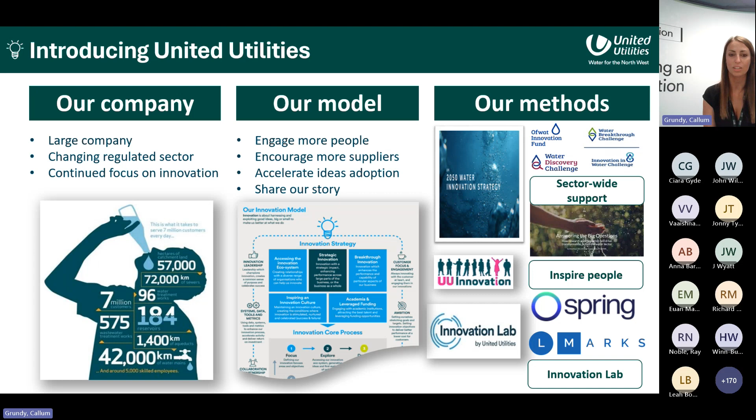Part of that is working on the OFWAT innovation competition and using the sector strategy - the 2050 water sector strategy - to hone in on the types of things we should be looking at, pushing them through different means of funding, with the OFWAT innovation competition being just one of those in terms of leveraging funding through that competition. I think the next slide should talk a little about the OFWAT innovation competition itself.

It's a £200 million innovation fund to help the England and Wales water sector grow its capacity to innovate and meet the evolving needs of our customers, society and the environment. The fund aims to go beyond the sector's business-as-usual innovation practices and create significant value for customers, society and the environment. In AMP7, that fund was £200 million, running to 2025, so we're nearly at the end of our investment period in England and Wales. We run in 5-year cycles, and in AMP8 we're looking at an increased innovation fund and more competition. We're really excited to be stepping into that. There are a couple of links on the screen for places you can go to find out more about the OFWAT innovation competition.

There's actually 3 components to the competition. There's the Water Discovery Challenge, which is led by suppliers, but the two that are led by water companies are the Water Breakthrough Challenge Transform and Catalyst programme. And we sat within the Transform stream for this project.

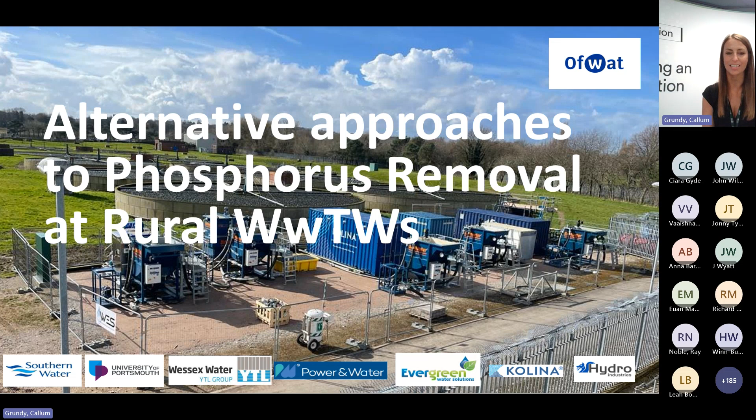Really excitingly, we were able to secure four of the electrocoagulation suppliers as partners on our project. These guys were supportive of putting their technologies side by side on a test against our conventional way of removing phosphorus. They were keen to get involved that they became partners on the bid, and they put up some funding to help us with that 10%. So we really thank everyone that is part of our partnership for making this project the success that it's been so far.

Phosphorus removal at rural wastewater treatment works - why do we need these alternative approaches? Well, our conventional way of removing phosphorus is really reliant on metal-based coagulants.

It is pervasive across the whole of England and Wales, and many other countries across the globe are really focused on removing phosphorus requiring chemicals. For us, as a water company in the Northwest, we've got some really challenging drivers to deliver in very small rural communities. We've had that in our current investment period in AMP7, and we can see lots more of that in AMP8. That was the same across a number of the project partners that were interested in the project, specifically for Southern Water and Wessex Water. This is a real challenge for us, and why we put the project together.

So we needed to look at alternative approaches to improve the quality of water in our rivers. We've got a number of phosphorus removal drivers in AMP7, around 900 of them, and we're seeing a similar magnitude as we head into our next investment period. These will mostly be delivered with chemical coagulants, and this has an impact on our carbon footprint. Chemical coagulation has a significant carbon impact.

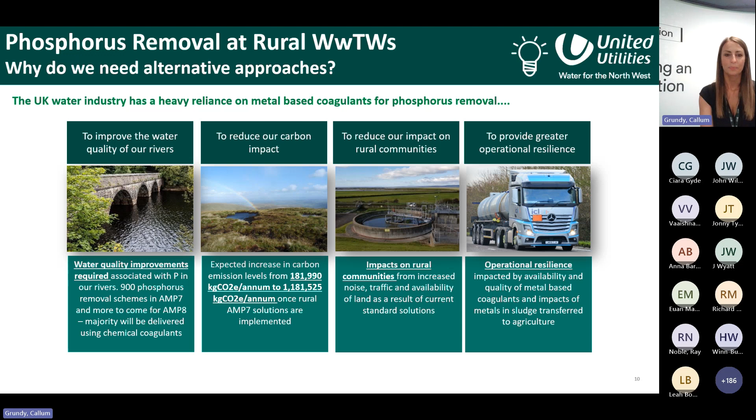Looking into AMP8, we know that phosphorus targets are getting much more pervasive across all of our sites, as well as the level of that phosphorus limit driving down lower and lower as we've moved through the AMPs. We have lots of ways that we've been trying to tackle this in terms of standard chemical dosing approach, both at UU and across the water sector, in things like biological phosphorus removal, but that is much more applicable to large wastewater treatment facilities and less so to small rural sites.

At UU, we had been looking at adsorptive medias or reactive medias, and we've been working with lots of other water companies for a number of years on trying to share that knowledge. So we thought that maybe the place to take that was into the OFWAT competition.

We also looked at electrocoagulation, and we were really excited about this as an alternative method. Callum will talk a little bit more about what this means, but for us, we didn't have certainty on the operational and maintenance costs of these things, and we were unable to convince our supply chain to work with us on these projects.

And then finally, we'd worked with Isle Utilities on an alternative to chemicals, so chemical-free treatment project with a number of other water companies, which highlighted some really interesting bio-based coagulants that could be used. So we thought that we would bring those as a sector level and prove those within this project and be able to share that across the sector for something very new and novel, which again Callum will talk to you about in a moment.

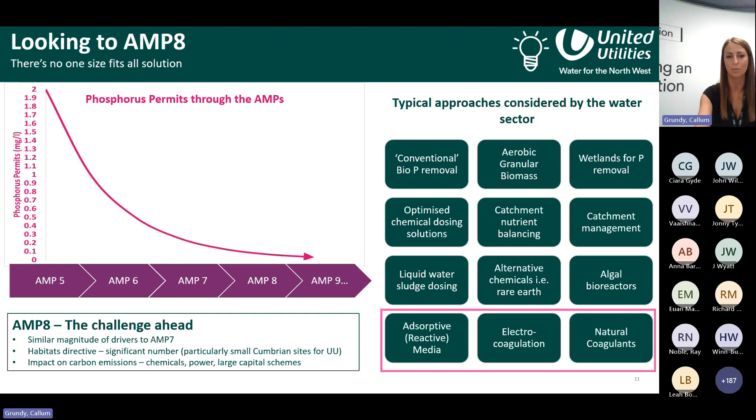So our proposal was a collaborative partnership to address this significant problem for the water industry. It was a £3 million innovation project that we put forward. And as I said, we had a number of water company partners as well as the electrocoagulation suppliers working with us.

We've been working with Jacobs and Stantec to support the project, as well as one of our construction partners, C2V Plus. We've had some advisory members of other water companies, Yorkshire Water, Welsh Water, and Severn Trent as well, who were late joining the project but have been supporting us as well. And the other names you'll see on there are the natural coagulant suppliers that form part of the project.

We were looking to really accelerate the adoption of these technologies, to gain insights from other sectors, and to do this comparative side-by-side testing, to really understand the life cycle analysis, so the carbon impact of these technologies, as well as the cost and operational impact as well. And then with that real focus on applicability for small rural sites, but with a relevance to the whole industry.

Some of these technologies we've tested in a rural kind of thinking space, but actually they could be applicable for large sites too. It's broken down into 3 work packages, which Callum and John will walk you through and talk to you about the testing sites. It's a 2-year programme that ran from June 2022, and we will finish in November of this year.

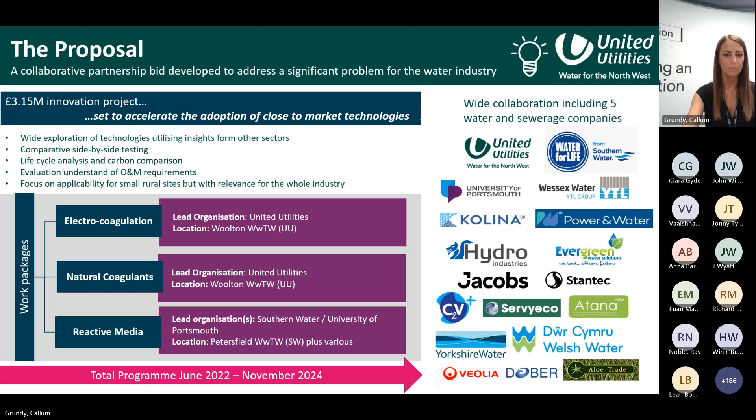So we're just giving you a flavour for the knowledge that we've gained so far without the project being completed. And so I think now I'll hand over to Callum to talk through work package 1. So we'll just swap chairs.

Morning, everybody. My name's Callum Grundy. I'm a senior process engineer at United Utilities. I've been involved in this project right from the concept, bid delivery, and right through the delivery of the pilot plant. And now we're into sort of report writing and dissemination.

So I've got 15 minutes per work package to take you through 12 months worth of learning. So it's going to be quite fast paced, but please bear with me. I'll do my best to talk you through it.

So the electrocoagulation work package, this was our work package 1. This was a side-by-side trial of 4 electrocoagulation suppliers for a period of 12 months. And you can see those supplier names across the top right of your screen. So that's Kolina, Power and Water, Hydro, and Evergreen.

Going into the project, we were aware that a number of water companies across the sector had done some of their own very short-term electrocoagulation trials. But what we felt was missing for the water sector was a real view on the O&M, the operation and maintenance impact of this technology. And with that in mind, we went for a 12-month trial.

The technology itself, if you're not aware with electrocoagulation and how it works - if you think back to GCSE chemistry, it's basically a series of electrodes, a cathode and an anode, and you pass electric current across the plates. The anode is sacrificial, constructed of iron or aluminium or any other metal that will coagulate, and essentially you are dissolving that plate in situ. So rather than dosing liquid chemical in the form of ferric sulfate or similar, you're generating it in situ by depleting a metal plate.

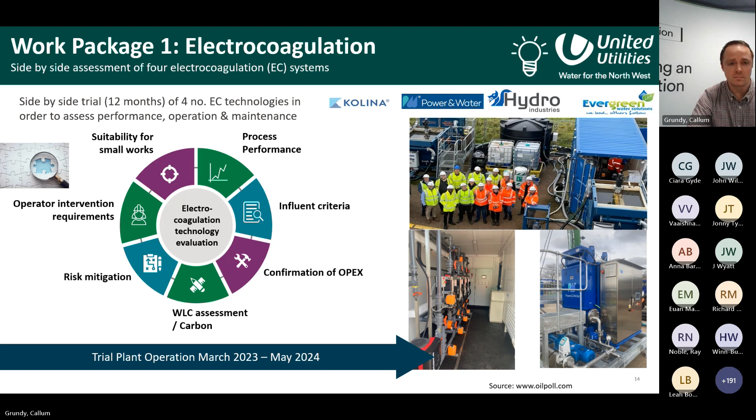The trial site itself was Woolton Wastewater Treatment Works. For those of you not familiar with UK geography, that's in the south area of Liverpool. It's a reasonably sized wastewater treatment works, only a 40 meg wastewater treatment works. So it's not a rural wastewater treatment works, but what it does enable us to do is to take side streams, so take a proportion of the flow and run that through an offline pilot facility. We actually hosted work package 1 and work package 2 on the same site.

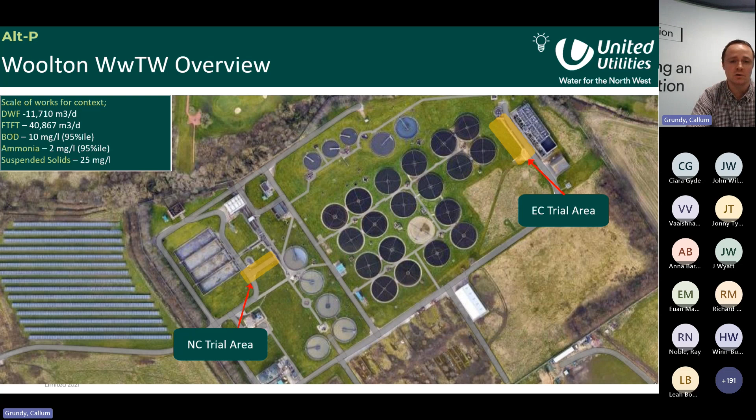Up the top end of site, highlighted here, is where we had our electrocoagulation pilot area. And down here, to the left of the site, is where we had our natural coagulant trial area as well. Part of the reasons why we chose Woolton were because it doesn't currently have a phosphorus permit, which means it doesn't dose chemical, which means there is phosphorus available for us to remove throughout the site. It's also pretty much 100% domestic, so there's very little trade coming into the site, so we thought it quite representative of what we would see out in a rural wastewater treatment works.

We tested a number of different dose locations throughout the trial as well. We started off with humus effluent on the recommendation of the suppliers, because that was the least loaded up in terms of solids, so potentially the most efficient for the chemical reactions to take place. Then we gradually moved it upstream, coming up directly off the trickling filter, so humus feed. We also did a period of testing where we dosed some salts to raise the conductivity, and I'll come on to that in some later slides.

So the next few slides, there's a lot of graphs and a lot of data. It might be quite busy, so I'll do my best to talk you through it in a short space of time.

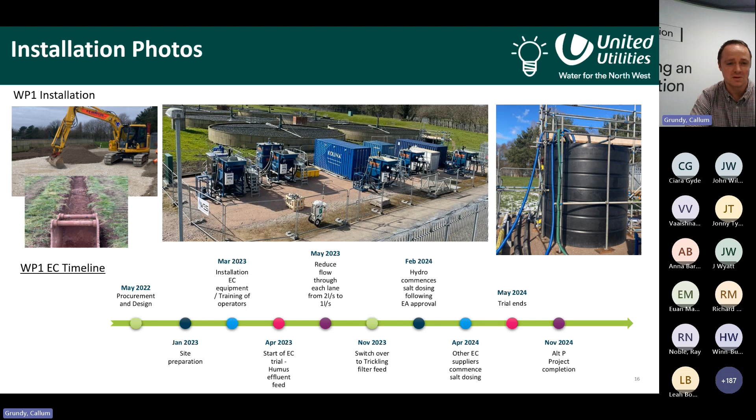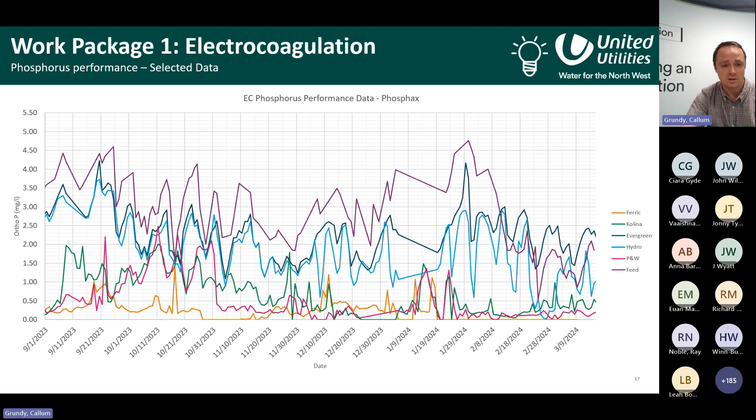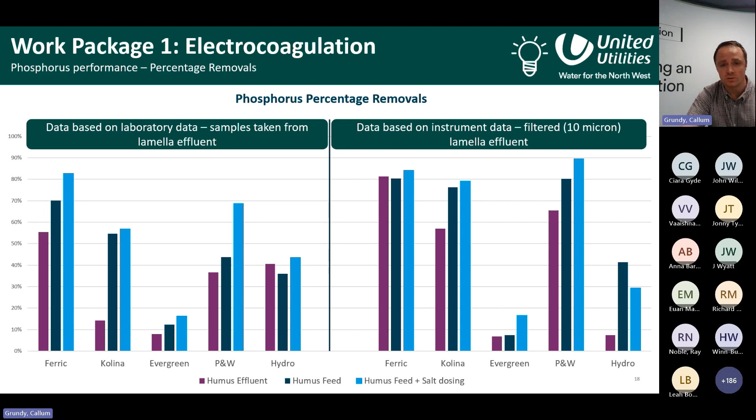Now, what you'll see is that when we looked at laboratory data, coming directly off the back of the lamellas, the ferric dose lane was consistently the best in terms of phosphorus removal, although there were some suppliers not far behind. When we moved across to the instrument data, those two suppliers caught up, which tells the story that we think there was something in the solids - and the solids data backs this up. The ferric dosed solids did settle better than the solids generated on the back of the electrocoagulation lanes. Not quite sure why that is, but it's something to investigate as further work - potentially looking at the mixing efficiency, or we're also aware that hydrogen gas is generated from the EC lanes, and we think that could potentially be adding a bit of flotation at the release point. But with solids capture, we think we can get comparable performance with electrocoagulation as you can with the ferric. That's the key message.

This should be taken in the context of pilot plant equipment. This is not fully designed equipment, it's temporary hire kit, it's pilot scale. So it should be taken in that context.

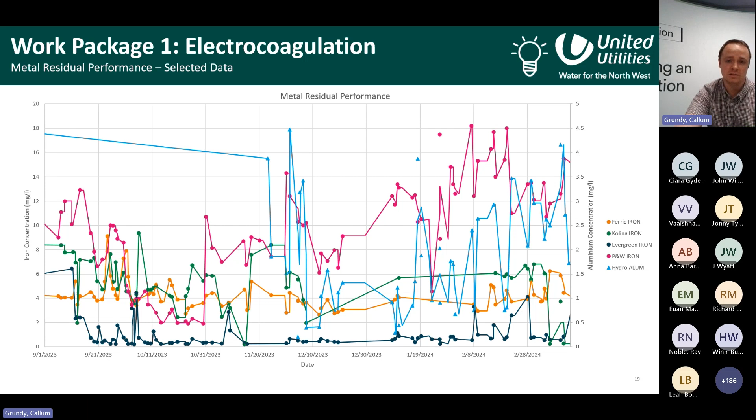We looked at the ferric lane, which is the orange, and even that is still hovering around the 4 milligram per litre mark, which we would typically be permitted for in the UK. But when you look at the electrocoagulation lanes, the power and water lane was very high on iron residual, the hydro lane was quite high in aluminium. Kolina was actually quite close to the ferric, but still risky. And the evergreen was low on iron, but that was mainly because it wasn't generating much iron initially due to issues with the design. So that needs to be highlighted as a potential risk.

When you consider the P removal performance in combination with the power consumption, it's something that needs to be considered in the context of a rural wastewater treatment works. Not all of these treatment works will have a massive power supply - they might need power upgrades. So this would be a major design consideration when considering electrocoagulation.

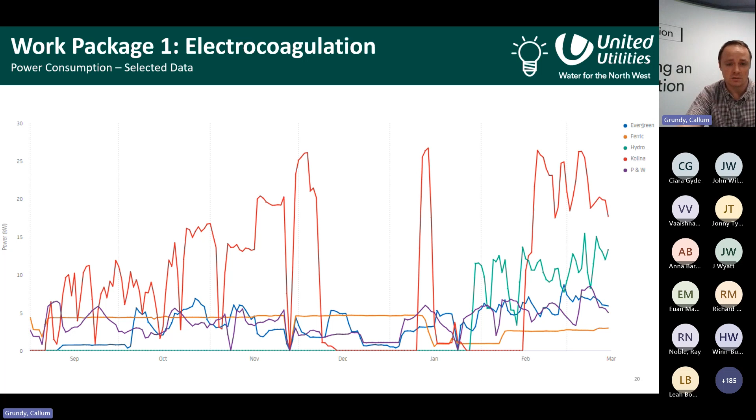On the flip side, we had the Kolina, which also had very good P removal, but the power consumption was significantly higher on that lane. But then when you consider the iron residual was lower on the Kolina lane than on the power and water lane, there's a lot of different things to consider in terms of how you would select a potential technology going forward. I imagine it would be very site-specific and permit-specific, but this just illustrates the variability in power consumption. You can actually see when it drops, as rigs were on and offline - it's quite a good representation to show when units were on or offline. So you can see the hydro was off for a while, related to a hydrogen issue that I'll come to in the next few slides.

With that in context, this graph tries to show efficiency in terms of milligrams per litre of phosphorus removed per kilowatt consumed. This does need to be taken in the context of which lanes were removing significant amounts of phosphorus compared to those which weren't. So evergreen looks reasonably efficient compared to Kolina and hydro, but in the context of performance, it wasn't removing much phosphorus, so it is skewed a bit.

You'll notice the ferric lane looks a lot more efficient, and that's because power is not really the true measure for ferric dosing in terms of comparison on OPEX. What we really need to do is convert this into pounds - milligrams per litre removed per pound spent on OPEX. When we do that, I imagine the ferric lane will come down a bit in line with these, but we included this for completeness because it was our control lane.

One thing you'll notice on these graphs, which I've mentioned, is that we did a period of salt dosing. The reason we did that is because, on advice of our EC suppliers, conductivity has a significant impact on electrocoagulation performance. You increase the conductivity of the water, you increase the efficiency of the electrical transfer, which means you get more bang for your buck in terms of power consumption and P removal.

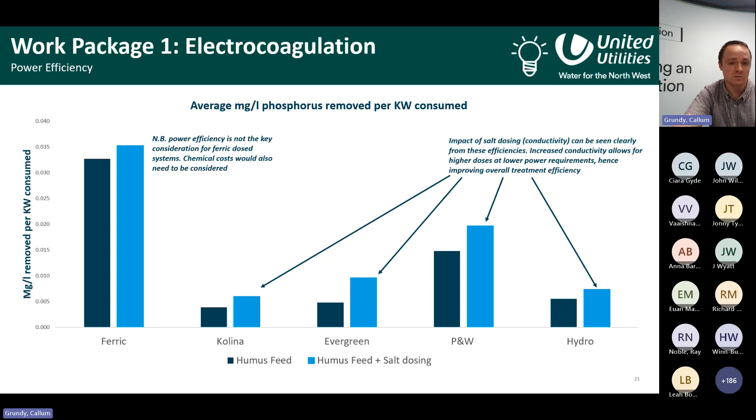So this is just a summary of some other key learnings that we've learned from our time on site with electrocoagulation. There's a number of different points highlighted on the screen, and I'm not going to go into all of them in detail. Some of them I've already covered. But one thing that does need to be highlighted is the hydrogen generation.

So at the surface of the plates, when you get the reaction, you do get hydrogen gas generation as a byproduct. And we actually ended up shutting down our pilot plant for a period of time after we detected hydrogen gas inside one of the shipping containers.

More a symptom of the pilot trial, because it was in shipping containers. In reality, it might be on a skid, but we did have to conduct a full DSEAR risk assessment. We had to install additional forced ventilation and monitoring inside the shipping containers. And we did share that learning with the rest of the water sector.

And subsequently, one of the suppliers has even modified their design to mitigate that risk as well. So at the time, it felt like something that wasn't necessarily going too well with the project, but we've managed to turn it into a real good learning point, and the suppliers have even picked up on that learning and adapted their designs. It was a real good piece of learning from the project.

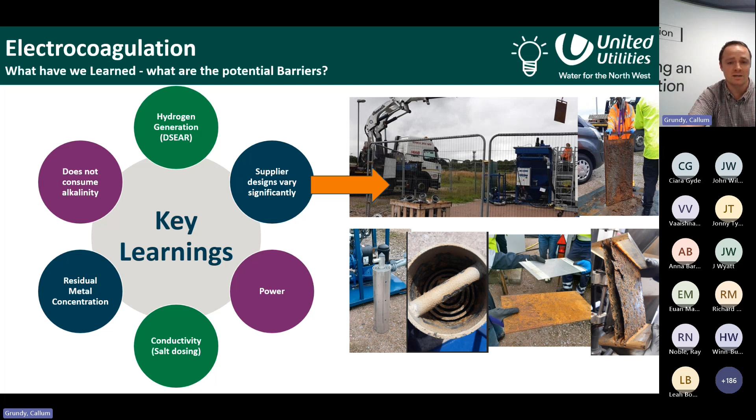So this is just a summary slide. Potential benefits and risks are highlighted here. We've talked about it being a chemical-free phosphorus removal system. It doesn't consume any alkalinity. The EC itself has quite a small footprint, and it could be applied in a modular approach. There's no requirement for chemical delivery areas, bund tanks, chemical storage tanks, and the associated health and safety impact with storing chemical on site. And quite often, the chemical comes in with lots of other impurities. You don't get that with electrocoagulation.

On the flip side, there are a few risks and barriers we've highlighted as part of the project which would need to be considered. We talked about the high metal residual. The power consideration varies from supplier to supplier. And passivation, that is the fouling of the plates - as you run electricity through the plates, you get a layer of oxide and hydroxide forming on the plate surface.

And essentially that increases the resistance of the plates, which basically puts your voltage up until it gets to a point where you would either trip on power or you would need to replace your plates. So that's something which needs to be considered in terms of plate life.

We talked about the scale. At the minute, we think it's only really applicable to small rural wastewater treatment works, mainly because there's a tipping point where the power versus chemical cost becomes unsustainable. And then DSEAR consideration is a big thing to think about as well.

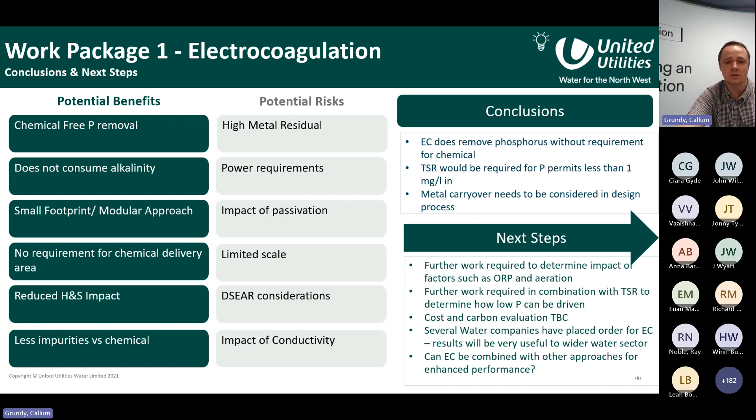In terms of the UK water sector position, several water companies have placed orders for electrocoagulation on some of their sites, and they've all been to site to have a look at our trial and share our learnings. We've had knowledge shares online as well, so a real positive outcome for the wider water sector in terms of that knowledge share across the companies. There's something I'll cover in the next 15 minutes, which is whether there's any potential to combine electrocoagulation with some of the other approaches we've tested.

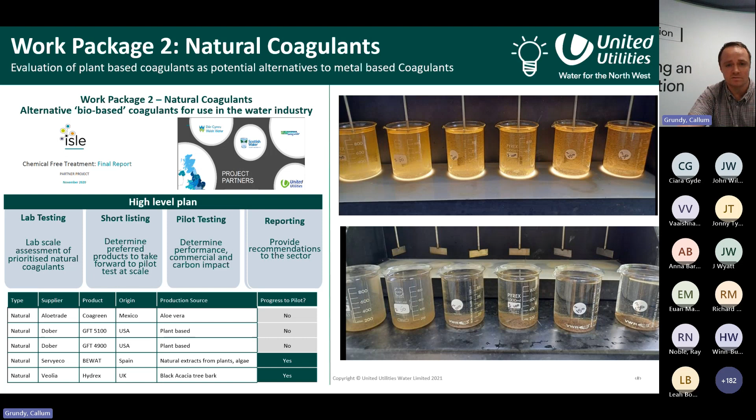On the back of that learning, we took the jar testing results, and we basically designed a pilot plant almost to scale up a continuous jar test. That was kind of the thinking behind it. So we ran pilot testing, and now we're in the reporting phase. There's some photos and jar tests there, but the video really does it justice if you get time to watch it.

In terms of timeline of events, I think we spent around 6 months doing a lot of lab work, jar tests, and data collection. Once we concluded that, we scaled up to a pilot plant on site, which looks something like this in the top right. I've got a flow chart in the next diagram which brings it to life a bit better. We started commissioning on site about August 2023, ran our pilot plant for around 6 months, and finished around winter time last year.

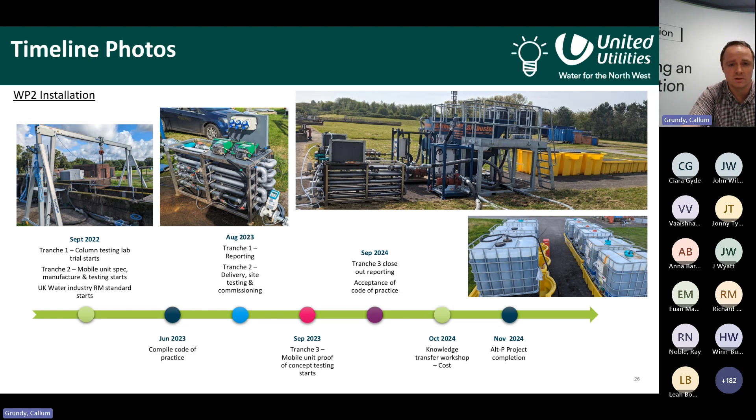So this is what the pilot plant looked like. Quite simple, I'll talk you through the flow diagram at the top. We took screened crude wastewater from the Wilton inlet channel, down here, and pumped it through a pipe flocculator, to promote some mixing. The flocculator had a series of injection points. In our control lane, we dosed ferric sulfate, and in our experimental lane we dosed ferric sulfate plus natural coagulants.

That's the BEWAT and the Hydrex, and then we settled it. So we tried to replicate what a dosing system, a simple dosing system, would look like in a primary settlement tank - a bit of mixing and settlement. That's what the kit looked like there: temporary hire flocculator, temporary hire settlement lamellas from Siltbuster. And then this is what the product looked like.

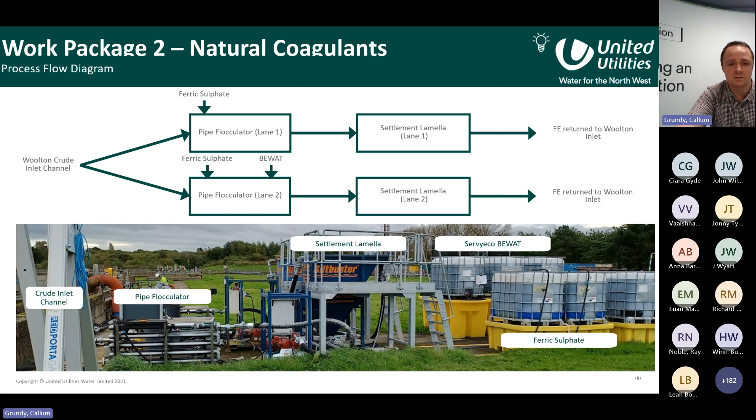So straight into some results. There's lots of results to share, and again these graphs are quite busy so I'll just talk through. The left-hand side of the screen, in green, is the BEWAT performance, and the purple on the right is the Hydrex, and that will be consistent for the next few slides. So BEWAT on the left, Hydrex on the right.

This is looking at phosphorus performance, and in each case we've got the feed in dark blue, the control for the ferric lane in orange, and the experimental data in pink. What you'll notice here is we started off very, very well with the experimental lane, outperforming on phosphorus, and then we had a period of gradual deterioration.

What actually transpired is that we had some issues with the flow meters on our pilot plant, which meant that the dosing was out for a period of time. But this is the raw data, so the performance is quite inconsistent for both lanes on this one. But the key thing is they follow a very similar pattern - there's not much detriment to the performance.

I should have mentioned, our experimental lane is using half the amount of ferric sulfate supplemented by the natural coagulant. In each of these cases, the control lane is using a 4 molar ratio of ferric sulfate, which is what we found from the jar tests, to meet a target of 1 milligram per litre P. So that was from the jar tests. The experimental lane used half of that amount of ferric supplemented by 100 ppm of the natural product. Should have mentioned that at the start.

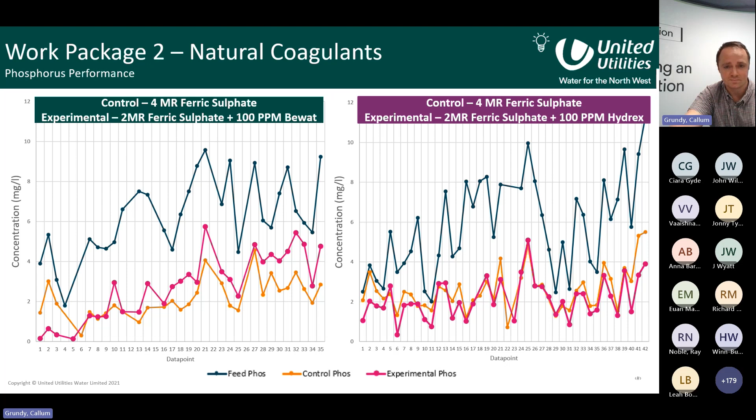Suspended solids performance. The left-hand side is the BEWAT, the right-hand side is the Hydrex. What you'll see is the experimental lane, pink, outperforms the control lane, so the lane dosed with ferric on its own, pretty much consistently.

Some of these numbers are very, very low as well, considering we're dosing it with the screened crude. So this is 25, this bottom line here. Some results are less than that. There was a bit of a wobble in the middle when we lost our control on the flow meter.

But you'll see something very similar with the Hydrex as well. The pink line is consistently outperforming the orange line. So the impact of the natural coagulants on suspended solids is pretty good. Some of these were crystal clear coming off, some of them look like final effluent.

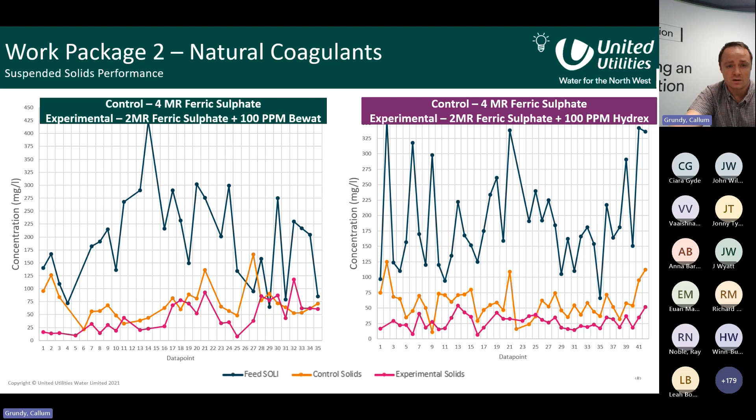Now, the real interest in learning, and you'll see it in this graph, is the impact on the iron residual. The feed iron is the blue, so pretty low coming in, as you'd expect, not much iron in the catchment. The control iron, the lane where we dose ferric sulfate, the iron residuals were quite high and quite erratic. But in the experimental lanes where we've supplemented with natural coagulant, you'll see that the iron residual is pulled right down.

Quite often below 4 milligrams per litre, which is where we're typically permitted. And bear in mind this is in a primary dose application, so we'd have further buffering downstream throughout the wastewater treatment process. So the key benefit to the natural coagulants, we feel, is the impact on solids management and particularly iron control.

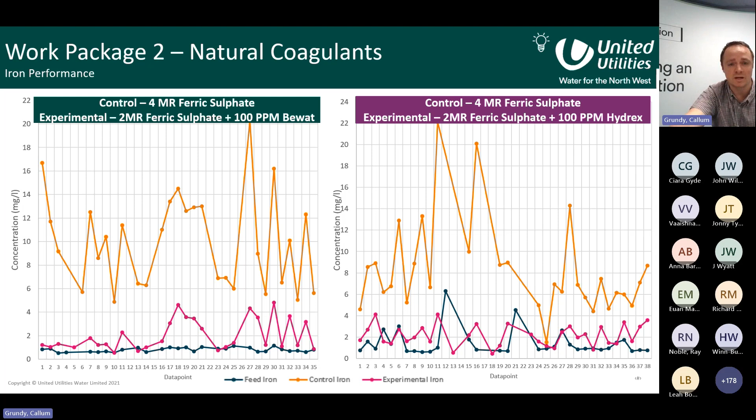There's a few other percentage removals here in terms of other things that we monitored. We've got our control lane percentage removals on the left, and the experimental lane percentage removals on the right-hand column. I've highlighted for ease the ones which outperformed throughout the different measured parameters.

You'll see that a lot of the highlighted columns are on the experimental lane, so the lanes where we dosed with natural coagulant. So not only did it outperform for solids and iron, which I talked around, it also outperformed for BOD and COD as well. There wasn't much impact on ammonia. And yeah, the ferric was probably slightly better on its own, but not significantly better overall.

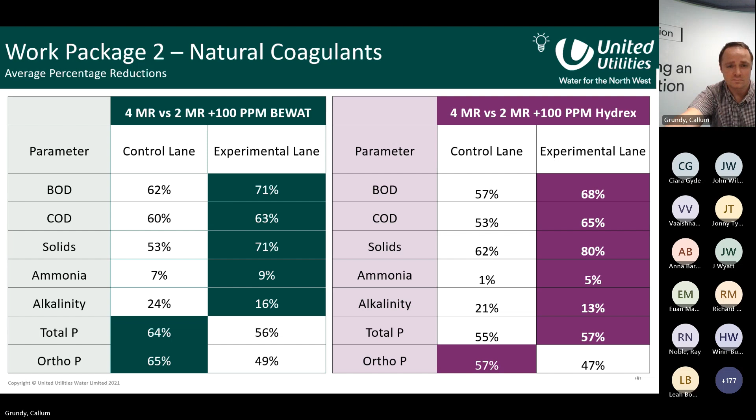Now, I mentioned this in the previous work package when I talked around the potential to combine approaches to phosphorus removal. So if you cast your mind back around 20 minutes when I was talking about high iron residuals from the electrocoagulation, and the learning I've just shared in terms of the benefit of natural coagulants pulling the iron residual down, we thought there was an obvious combination that we should try.

So we actually did a very short trial at the end of the project where we dosed some natural coagulant into the floc tank in the power and water rig to see if we could control the iron residual better. Bear in mind, some of the iron results were in the high teens on the power and water lane. You'll see the bottom left is the iron, the effluent iron when we added the natural coagulant.

You can see here it was 20 before we added it. When we added the natural coagulant, it was consistently less than 4. And the interesting thing is the graph on the bottom right, this is power consumption on the power and water lane, consistent with the dose rate. What we found was when we supplemented with a natural coagulant, we cut power consumption by 75% because it enhanced the effects of the iron that was generated from the plates.

We also saw some benefits in terms of P removal, top left, and solids performance, top right, but the real key was controlling that iron.

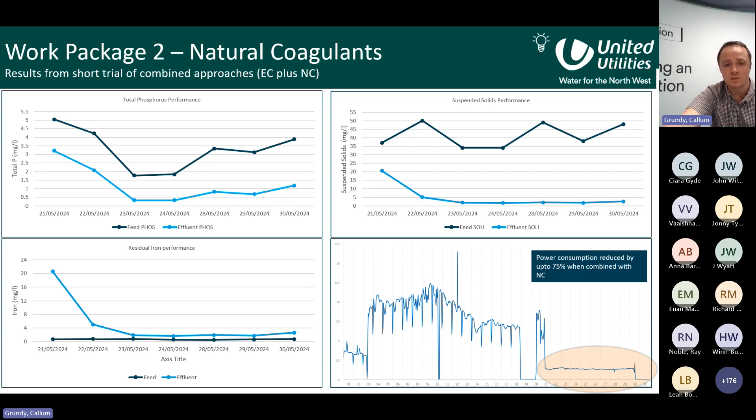So just to summarize some benefits, risks, conclusions, and next steps.

The benefits of natural coagulant: the obvious one is the improved impact on iron residual and solids performance. There's also slight betterment on alkalinity consumption. So on sites where it might be borderline, if you reduce your ferric and supplement it with natural coagulant, you might not necessarily need to implement caustic, although we do need to collect some more alkalinity data.

There's potential to remove that load on downstream assets if you dosed it in a primary application, reducing reliance on ferric sulfate. We're still doing this work, but we think there's a high possibility that we will reduce operational carbon. Now, one of the risks or barriers I haven't mentioned yet is the requirement for EA approval to use these products at scale.

We have been negotiating with the Environment Agency at a national level, on behalf of the whole UK water sector, so that we can start to move some of these natural coagulants towards full-scale trials. We've had to provide a lot of evidence and third-party opinions on the products to get anywhere close to EA approval, but we think we're almost there. And as I said, that will be done on behalf of the whole UK water sector.

Something that needs to be pointed out: from a unit cost perspective, these are more expensive than ferric sulfate. So a full cost-benefit analysis needs to be done on the wider impacts across the wastewater treatment works. We certainly feel if you're putting it in as part of a new build solution, and you could design it in instead of mechanical equipment for iron control, then it would save you a significant amount of capex despite the increased opex.

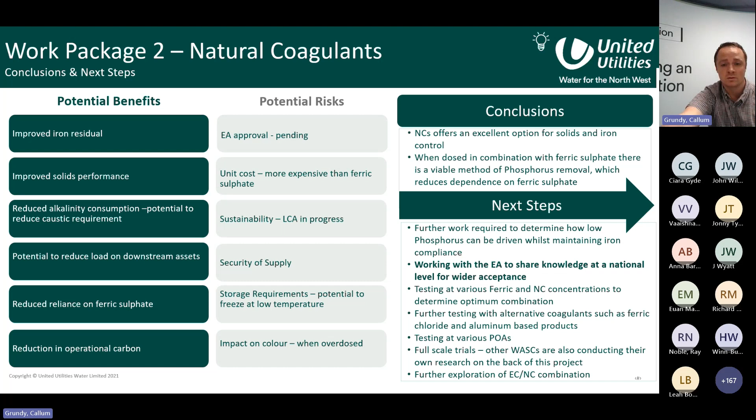So I think that concludes my part, and we're on for a break now.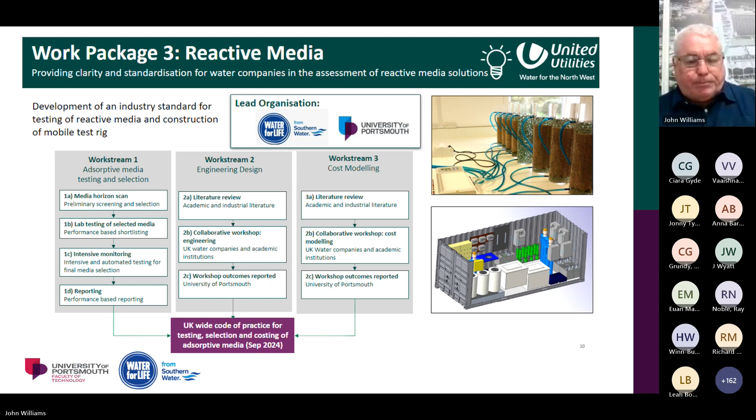We've been doing most of the work on site, on real wastewater treatment sites. We have a field station at Petersfield Wastewater Treatment Works, which we rent some buildings and outside area from Southern Water. At this site, we've got an innovation hub with Southern Water. We work on lots of R&D issues, and we also work with the supply chain SMEs. The beauty is we can run pump supplies from the wastewater works and run large-scale pilot rigs. We have on-site labs to test. So that's the facility we've been using.

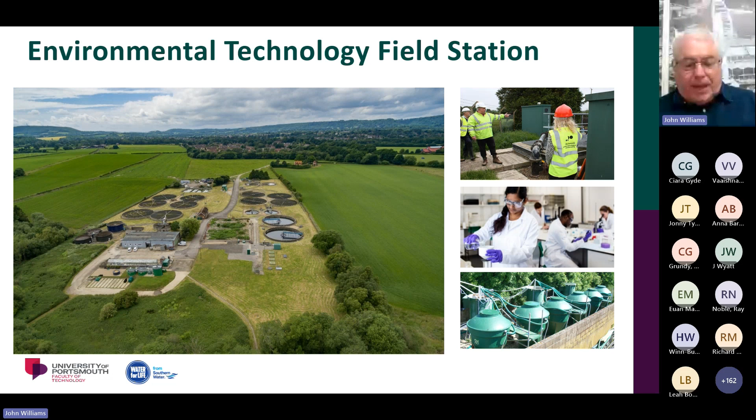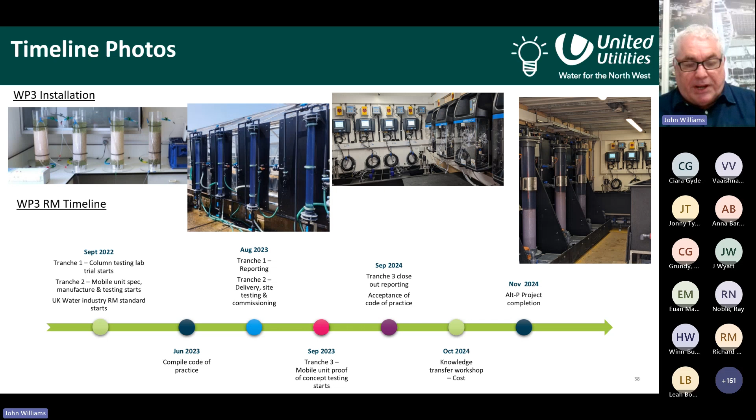If we move on to what we actually did in the project, here's the timeline. It's all on my screen. So here we can see in September 22, we've started some column testing in the lab, and we're also doing some outside column testing with faster rate media. And then moving through, we've moved to set up our containerized rig, and that was set up at another wastewater treatment works close by, a place called West Marden. And then finally, we're moving through to the latter stages of the project now and the project reporting.

So in terms of the trials, the first one, we're looking at the practical trials. The first thing we did was do a large media horizon scan, and we looked at, we collated about 20 potential media, and then we went out to industry, the partners and beyond, to survey what would be the most appropriate media, what criteria should be applied, and we had a scoring system which actually ranked different media in terms of their interest to the water industry.

We ended up deciding to split this into two. One was low rate media, so generally media which have got a higher hydraulic retention time, and the media which was scoped in were Phosgrain from DTI, Phosflow supplied by PET Limited at the time. And I've been working with some MSc students over the years on producing calcined cockle shells as a reactive media, and the circular economy aspects of that appealed to the partners who were scoring it, and so that was selected for low rate media studies in the lab.

And we set up columns with 3 different empty bed contact times of 6, 12 and 24 hours. And the site we were doing is at Petersfield. We were running with final effluent from the works, but as there's already dosing phosphorus removal on site, we had to dose up the effluent. So we dosed the effluent up to about 10 milligrams per litre P for these column trials.

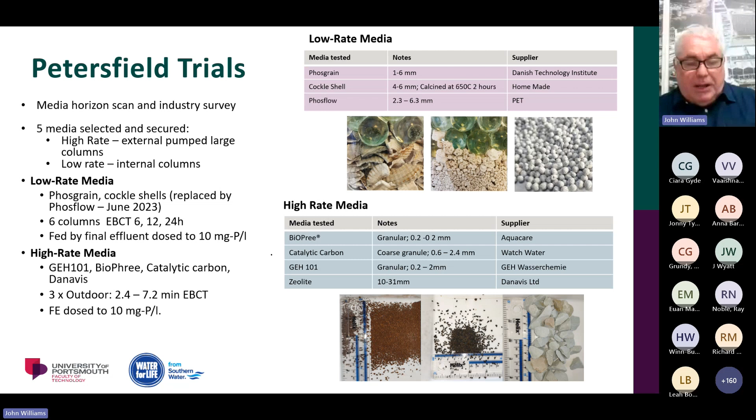Externally, for the high rate media, we had 4 media selected: the GEH101, BioPhree, catalytic carbon, and Danavis, and we ran these in outdoor trials at much shorter empty bed contact times of 2.4 and 7.2 minutes, again with Fe dosing. We decided to use empty bed contact time rather than specific mass or specific surface area, so that we were actually comparing volume per volume, because if these are going to be deployed in a filter or wetland or some other system, it's the size of the system which would be most appropriate for design. Let's talk about the high rate columns first.

These were outside, pumped with final effluent which we dosed. This trial was very difficult because we found the chamber we were pumping from seemed to accumulate solids, and we seemed to be fighting an ongoing battle against suspended solids. I came up with various filtration methods and eventually a sacrificial reed bed to try and handle these solids.

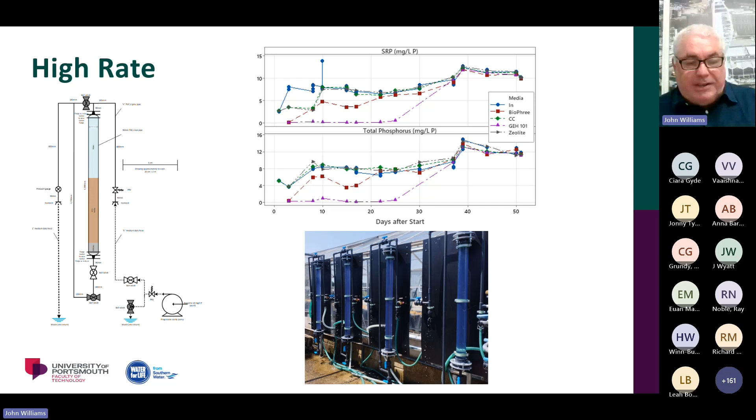We had some good results, maybe the GEH media was performing the best over the longest time, but we had a real problem trying to control the flows and control the backwash on this. We also had an engineering design workshop with the water companies, and the water companies who were there actually scoped out and said this wouldn't be the application they'd imagined for reactive media. So we completed this trial and didn't take it any further.

In the lab, on the low rate media, we were working at 6, 12 and 24 hours empty bed contact time based on the previous results. We hit an issue straight away: the cockleshell media, which had performed very well in the lab with a synthetic wastewater, when we started pumping the real Fe through it, the performance wasn't anywhere near as good as we saw in the lab. You can see that purple dot line at the start of the trial, and we abandoned that because it was just not working.

We moved over and replaced it with the Phosflow. In the meanwhile, this had originally been scoped out because the water industry were worried that it was related to the Phoslock technology, also marketed by that company. They were worried about a couple of the elements in there. It turned out this was actually a different material - it was the Poseidon pellets from Wastewater in the USA, which was being marketed in the UK as Phosflow.

So we replaced the cockle shells with the Phosflow, and we can see here we've carried on these columns being monitored regularly for over a year, and we can see that both media, the Phosgrain and the Poseidon pellets, are both performing very well. We've got some increases here - I'm afraid my screen's showing this very small - but after about 200 days, we can see the 6-hour empty bed contact time for the Poseidon pellets going through.

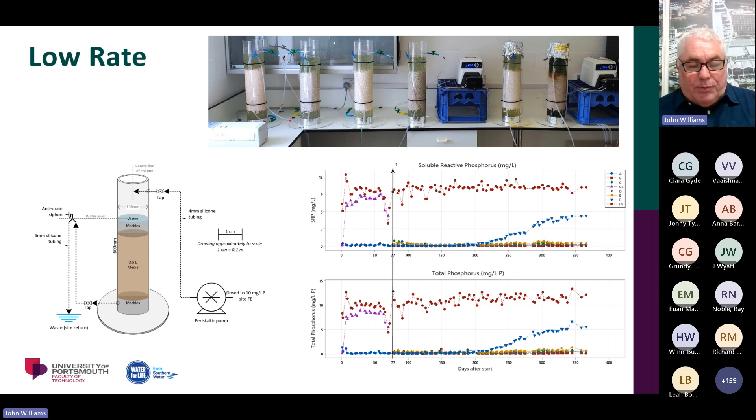If we look at the results for both these media, we were getting much higher uptake rates than we've seen in various other commercially available media we've trialed in the lab. They are a little bit smaller, so they might need a little bit more solids protection, but that means they would be able to operate for longer periods in the field, or maybe the media beds could be sized at a smaller rate.

But most interestingly, just look at this - nearly all the media available on the market in a granular size for a filter tend to increase the pH above limits for discharge, and that requires an additional stage, you've been using carbon dioxide dosing to bring the pH down. But with the Phosflow, stroke Poseidon pellets, after the first couple of days, the pH for these media was well below acceptable limits for discharge. So we think through this column testing, we've established 2 media which have superior uptake rates and uptake capacities than lots of the media which have been trialed before, and also a media which avoids having the extra pH amendment stage.

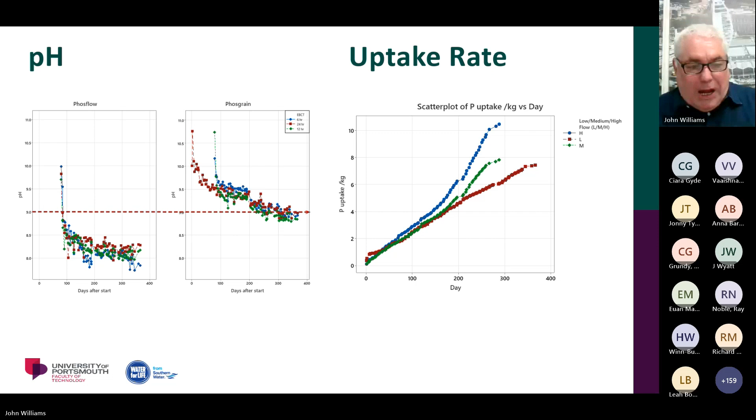So the next stage for this project was the containerized trial. The concept is if we've got a container equipped with test rigs and online instrumentation, this could be placed at any sewage works with different water chemistries, and we can test different media and assess their suitability for different deployments.

Within this container, we've got 3 columns. We went out to the stakeholders and built these 3 columns up. The 3 media we started within the lab trials. There was debate about whether we should put in some of the media used more in practice, but the thought was that these have already been tested quite significantly in the field.

On the right here, a medium-sized filter, about 600-litre, which we filled with the Phosflow stroke Poseidon pellets. All of these are linked up to telemetry, phosphates units, total P, soluble reactive P, turbidity and pH, and so on. This is all connected through the whole range of the Claros system to give us continuous readings.

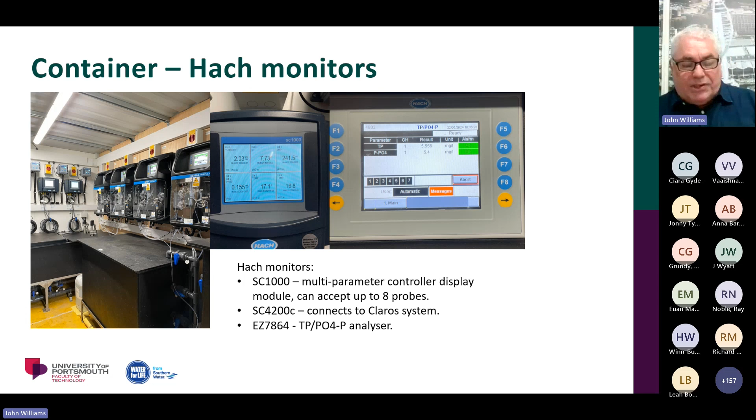I'm not going to go through the results, we haven't processed all this data yet. We've actually found the container to be quite a demanding platform - lots of issues with the pumps, and we found the analyzers have needed more care and attention than we originally envisaged.

But we are getting good results, we need to process these. There's been some interruptions of flow through the works as well - the works has no flow at times, and that can trip the system out. But we have got some very promising results coming through from these trials.

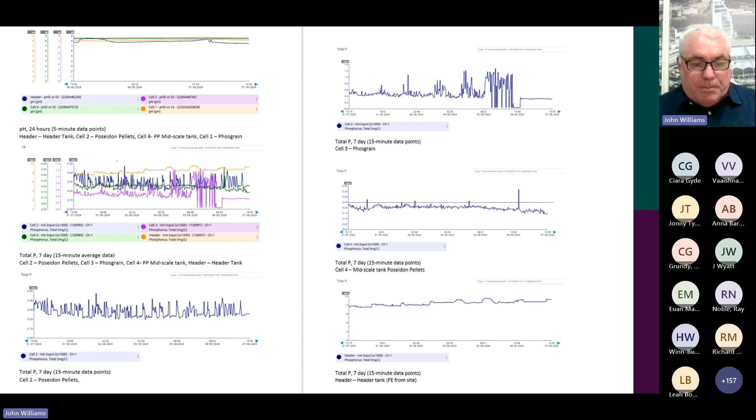The other strategies we've been looking at - one was the engineering design. We held a very interesting workshop hosted by Stantec in Birmingham, with 15 attendees representing 8 water companies, and probably overdid the sticky dots on the flip charts. But we really had a whole day's discussion about how this might be deployed, what might be the population size ranges, what might be the characteristics of media which would be most appropriate, what about replacement, recovery, and pH adjustment. This is going to feed into, alongside the testing, a code of practice as an output from the OFWAT project for the use of reactive media.

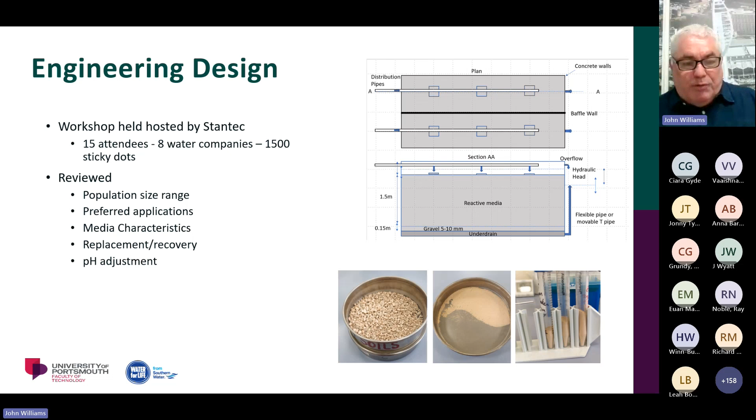There's quite a few questions moving forward, but one key one is the cost modelling. Although these media we identified through this trial may have superior performance characteristics, they are more expensive than some of the other media on the market.

We tried to organise a cost modelling workshop, but we had much less interest in this than in the engineering design workshop. So we've been working with our water company partners, United Utilities and Southern Water, and some QSs from my department, Tom Woodbury, to come up with some cost models for comparing reactive media in different size beds with different replacement media with ferric costs.

We're currently still working on that. We've got a first principles cost model to look at filters and wetlands, which we're currently putting in costs to come up with estimates of where reactive media sits versus ferric.

And of course, ferric isn't just the actual dosing equipment. There's some interesting data in some of the water company reports about the other externalities, which Callum and Lisa have mentioned previously.

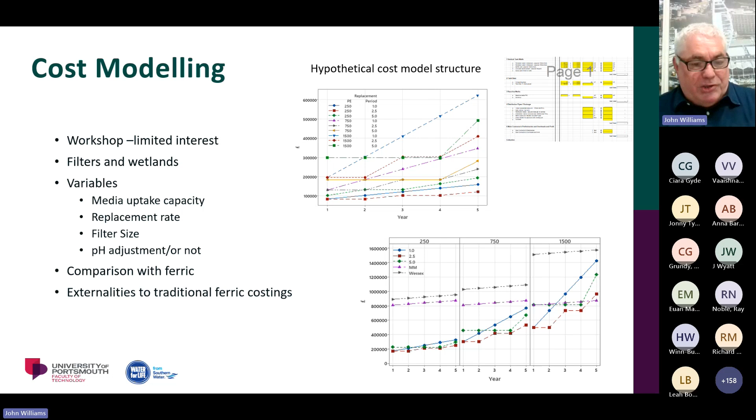So in conclusion, we can get very low P consents with reactive media. We've got some media performing very well that do not require pH adjustment. Cost is going to be the deciding factor, as is solids management - obviously small works can have occasional issues with solids carryover. We need to work through the cost questions about what replacement periods might be appropriate, and in the longer term, how P might be recovered.

The container was a great demonstration of the engineering potential, but at the moment is requiring a bit more tender loving care than we imagined.

I'll hand over to Callum then.

Oh, slides have disappeared for me. Is it possible to reshare them, Leo? Oh dear, did I press something? Sorry, bear with, let me just get you to the slide we were on. Sorry, I'm not used to Teams. No, you're fine, John. Yeah, they're back for me.

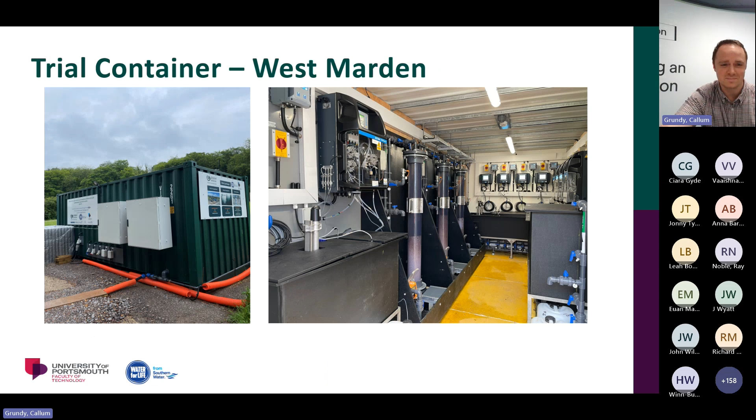Just in terms of the summary then, work package 1, the electrocoagulation. So the key takeaways: it does remove phosphorus, but there are a number of other considerations to think about, namely high metal residuals and potential requirement for downstream protection. The conductivity has a significant impact on both power and performance, so that would be a key characteristic to consider when evaluating sites. And the hydrogen gas, which is generated as a byproduct, requires a DSEAR risk assessment.